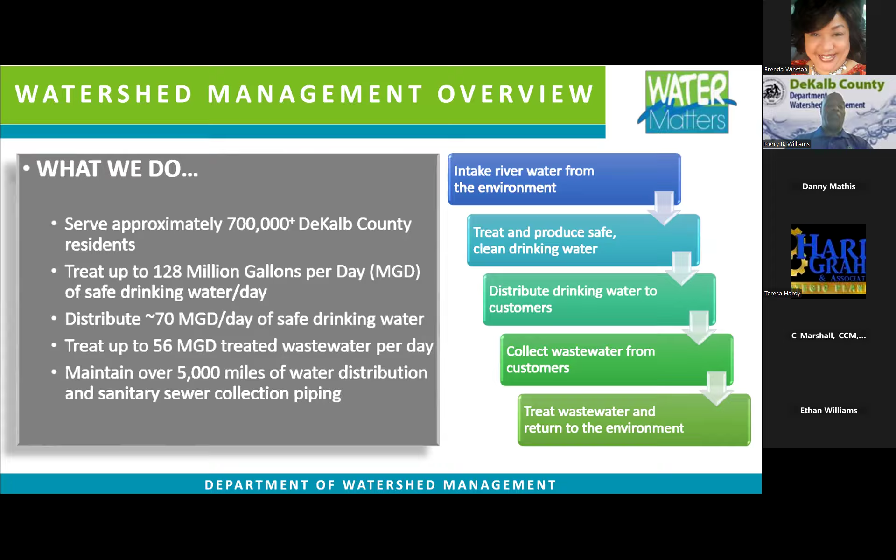To serve you, we clean, inspect, and maintain 5,000 miles of water distribution and sanitary pipe. Unlike a road, where you can see the asphalt deteriorating and needing repair, pipes in the ground you cannot see - out of sight, out of mind. That's why people tend to overlook this infrastructure that's been there since the 1950s. That's part of the project: to upgrade our infrastructure to bring you better water pressure, cleaner water, and reduce the likelihood of water main breaks in the system. Next slide, please.

So again, what do we do? Why are we replacing these lines? They improve our customer service, and as I just said, reduce water main breaks. If you experience discoloration in your water or low water pressure, it's probably because we have aged pipes in the system, and we are proactively trying to get those pipes replaced and updated to give you what your water bill pays for. I always like to tell people this is not your tax money, this is your water bill. Next slide, please.

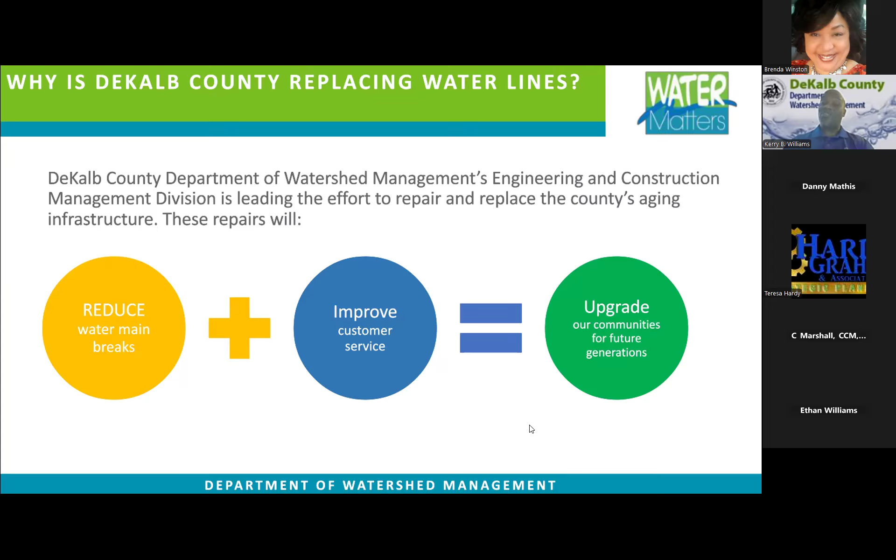Bringing you this project, we have a team of consultants such as AECOM and construction contractors such as GS Construction. We all work together for the design and construction of this. Next slide, please.

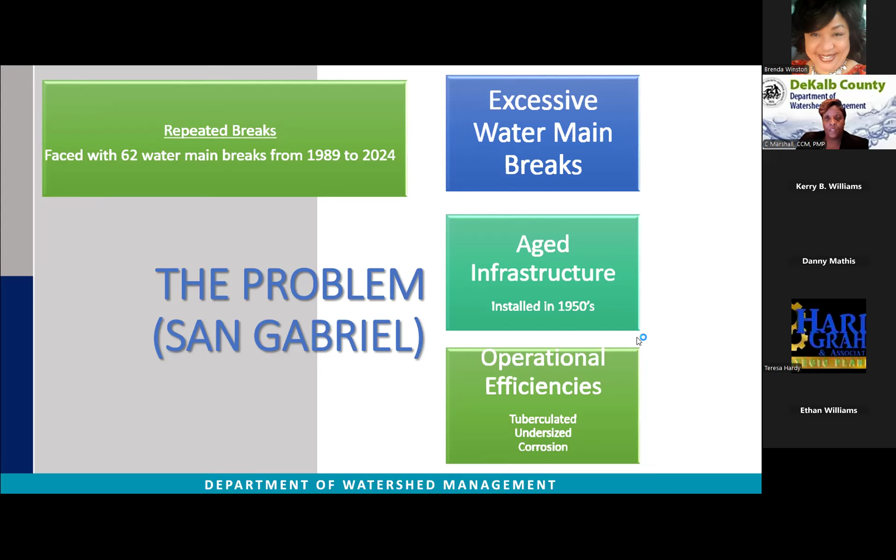So what is the problem and why are we replacing the pipes? This is primarily due to the pipes being installed in the 1950s, the infrastructure being aged, and other sections of pipe being undersized. In the area, the county has been faced with over 62 water main breaks from 1989 to 2024. As the number of pipe failures increases with time, it is a good indicator that the pipe is in need of replacement. The pipe material in this area is primarily old tuberculated cast iron pipes, 2-inch PVC, and cement pipe. The lifespan for these pipes is 50-plus years. Therefore, most of the infrastructure in this area is at the end of its useful life. Next slide.

So what is a capital improvement project? It's a project that helps maintain or improve an asset. It can either be new construction or a replacement of an existing infrastructure.

Last year, the Board of Commissioners approved a new CIP for $4.27 billion for projects to be completed from 2025 to 2034. The San Gabriel Water Main Replacement Project is a $20.5 million project within that plan.

My team, the CIP team, is responsible for getting the work done. My team includes 4 DWM construction project managers and 12 licensed inspectors.

Next up in the presentation, you will also hear from the DWM construction project manager, Mr. Danny Mathis. He has over 25 years of construction experience and has multiple certifications and licenses.

Along with in-house staff, we are also supported by consulting firms who help assist the county with construction management and inspection services. So what we want you to know today is we're here to help.

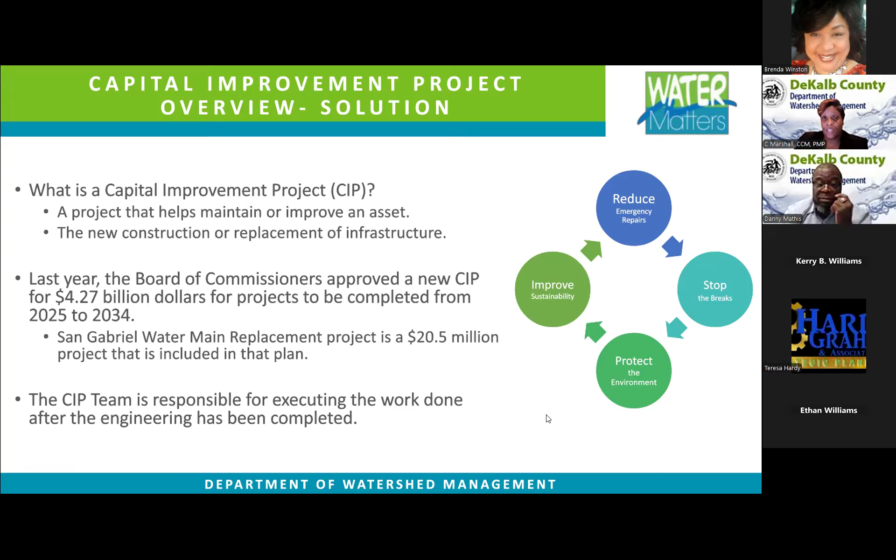We want to reduce or eliminate emergency repairs. We want to stop the breaks. We want to protect the environment. And finally, after this project is complete, it will improve sustainability to the system. These improvements should last a minimum of 100 plus years.

You will now hear from Mr. Danny Mathis, the construction project manager for this project. Thank you, Cassandra, for the introduction. Again, my name is Danny Mathis, and welcome to this presentation.

San Gabriel Water Main Replacement Project Scope. The plan is to install 36,500 linear feet of 8-inch DIP pipe, 5,400 linear feet of 12-inch DIP pipe, and 1,200 linear feet of 1.5 inch copper pipe, which is for the services, including service lines, hydrants, valves, pavement restoration, water meter boxes to grade.

The trench will be milled and resurfaced once the new water line is installed and completed. The existing 6-inch water main will be abandoned in place and filled with non-shrink grout.

The site conditions will not be altered from the existing. All disturbance pavement and landscapes will be replaced in kind. Erosion control BMPs will be installed throughout the entire water main alignment. No more than 1,000 linear feet of trench will be opened at one time and must be filled and covered daily.

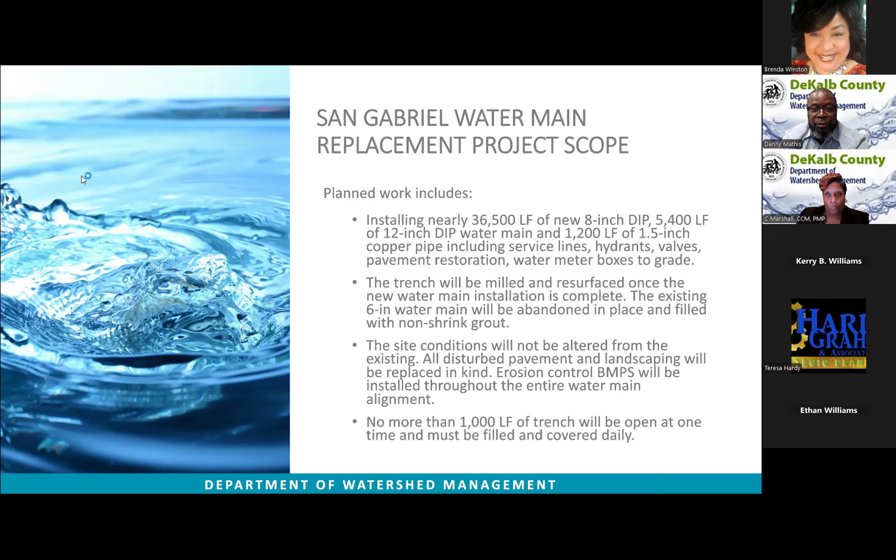There are 23 affected streets for 3 phases of this project. We're going to pause for a second, let you find your street, and then we'll go to the next slide.

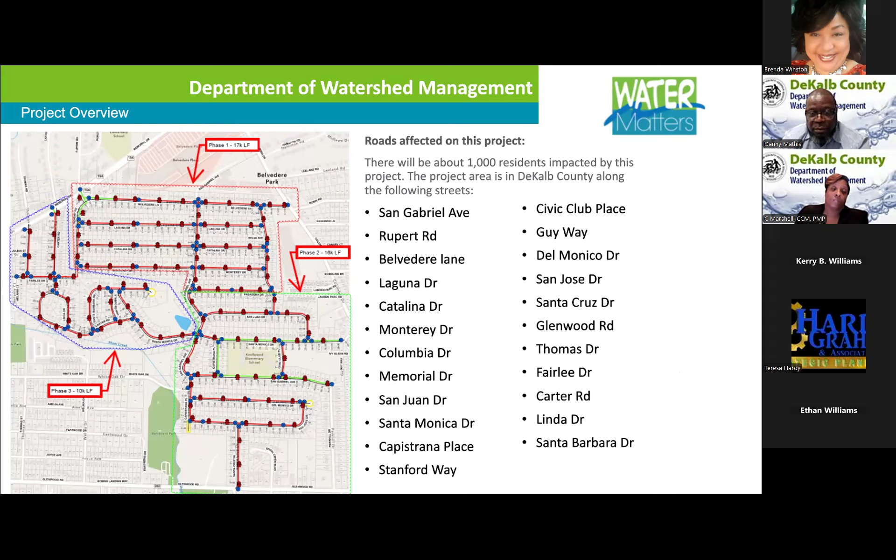The open cut method consists of cutting the asphalt, digging the trench, and installing a new water line, backfilling the trench and replacing the asphalt.

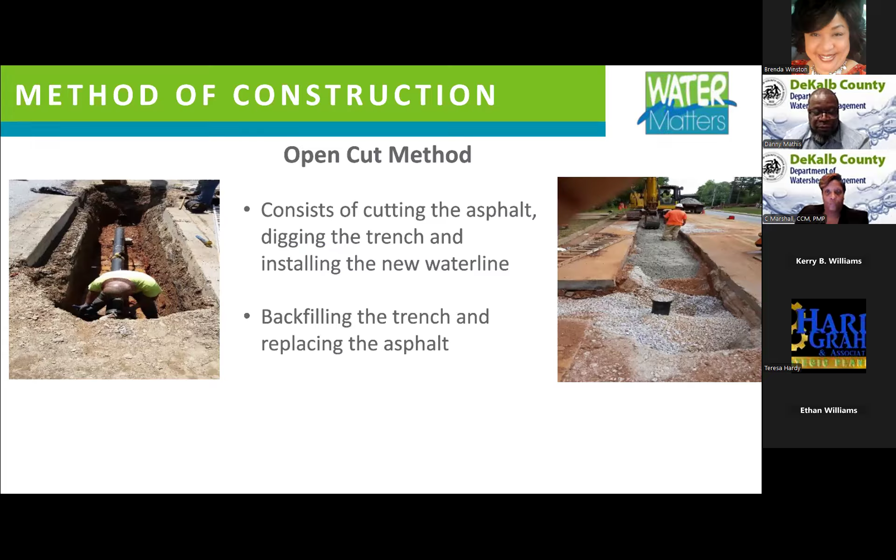Schedule of activity: community notices went out the week of September 29th. The community meeting is today. Mobilization starts October the 9th. Construction starts the week of October 13th. Final restoration and paving starts August 2026. End of construction December 2026.

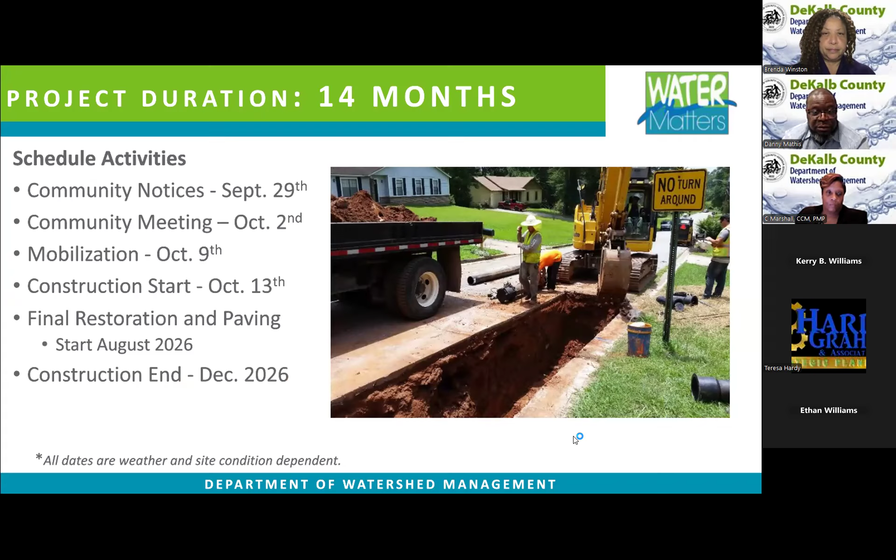Boots on the ground, that's my team. My team will be responsible for ensuring erosion control and sedimentation controls are in place, ensure proper installation of the pipe, will handle customer complaints, coordinate with other municipalities, and ensure traffic control is maintained and safety measures are followed.

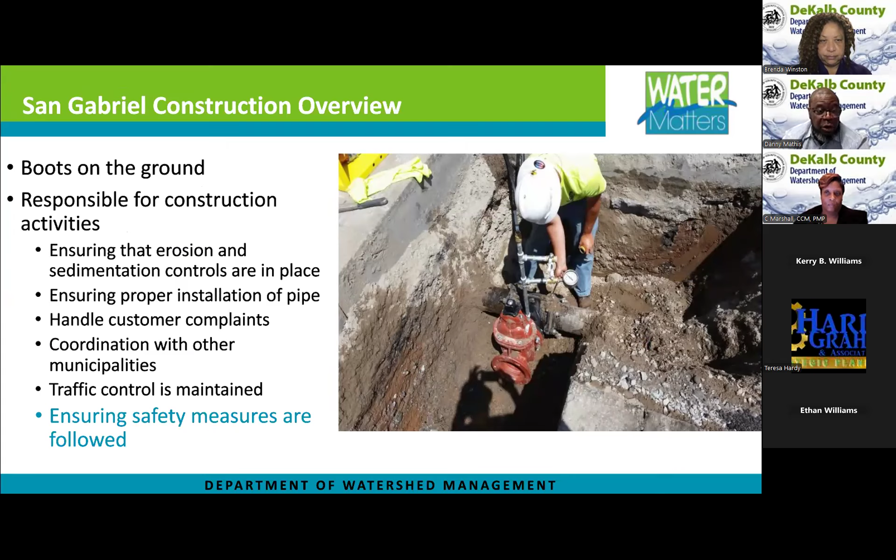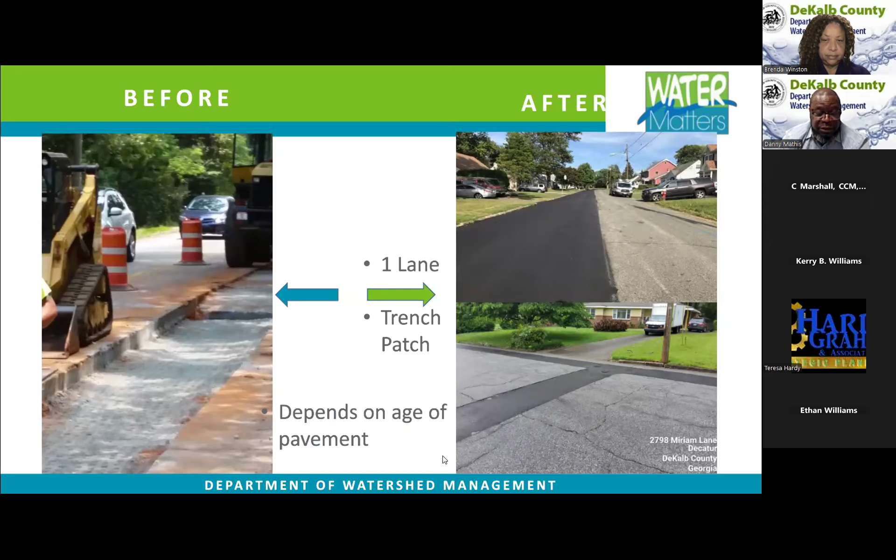This picture represents before and after. Before, we have the trench open and we're backfilling with graded aggregate base, putting it in 2-foot lifts, and tamping the street. The picture on the right is just a trench patch, and the trench patch will be installed on this project, depending on the age of the existing pavement.

Next you will hear from Ms. Marshall again. Thank you, Danny. I will now address community concerns and what the community should be aware of.

Okay, so everybody hates construction, right? But we want the pipes to be replaced. So unfortunately, what comes with construction is inconveniences, which we want to try to minimize. What you're going to see is a lot of construction traffic, foot and vehicles, large dump trucks, and heavy equipment.

There will be construction workers, county employees, and contracted workers throughout your community. There will be material and equipment deliveries by means of large tractor trailers. However, we will have flaggers on site that would help guide these vehicles in and out of your community.

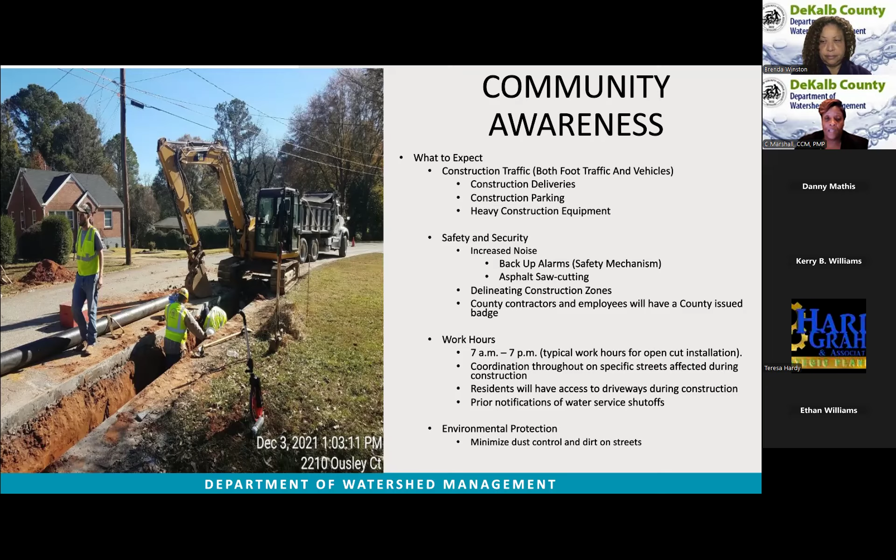What also comes with working in the area is the parking issue. There will be vehicles parked alongside the streets and along the work zone. Work zones will be delineated by means of orange cones or barrels. In addition, as a security measure, all county contractors and county employees will have identification badges and marked vehicles.

There will be increased noise from the equipment backup alarms, heavy equipment, and saw cutting of the asphalt. Our typical work hours are from 7 a.m. to 7 p.m., Monday through Friday, and sometimes weekends, and in cases of emergencies, sometimes on Sundays. Rest assured that all residents will have access to their driveway during construction.

However, the work is occurring in a linear fashion, so your driveway may be blocked to allow for installation of the pipe. When this occurs, the contractor will ask if you need to get in and out of your driveway before blocking it, and may request that you park on the street for the day. In other instances, if the driveway is blocked, just come out and ask the construction team to let you out, and the contractor will move the equipment so you can leave for the day and return later.

Also, this work generates dust. We want to minimize dust and dirt on the street. Therefore, the contractor is responsible for keeping the streets clean and swept daily.

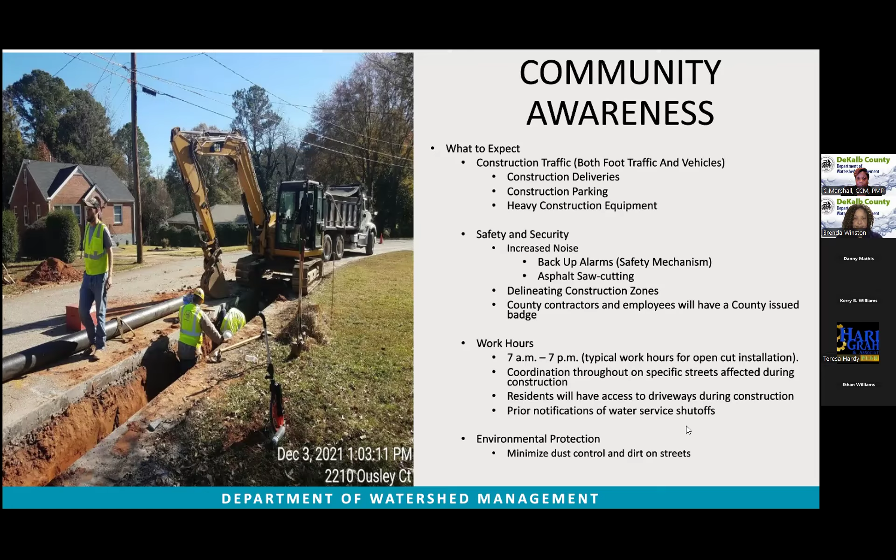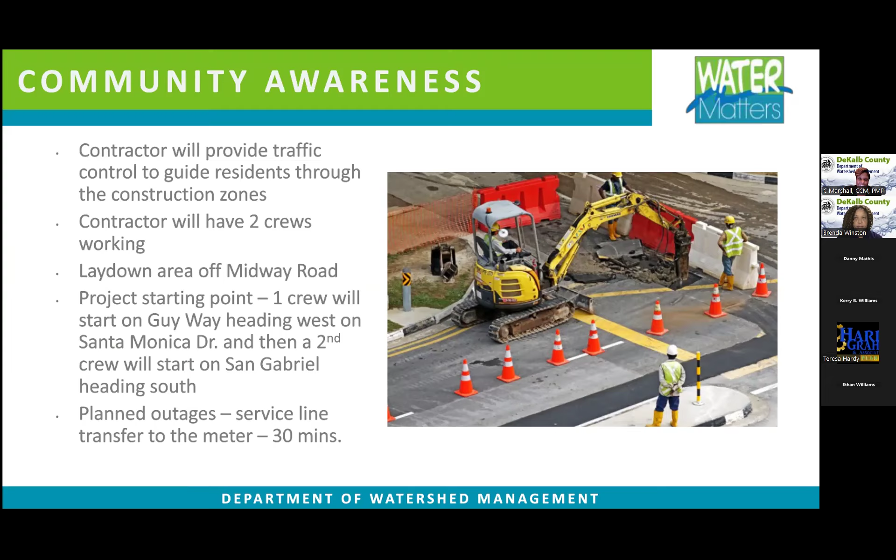The contractor will provide traffic control to guide residents through the construction zone. The contractor will have two crews working. The current laydown area for materials and equipment will be off of Midway Road. The project will start with one crew on Guy Way, heading west on Santa Monica Drive, and a second crew starting on San Gabriel, heading south. There will be planned outages, generally when we're doing the service line that runs to the meter of your home. When we're transferring the new service line over, that generally is a service interruption that can last up to 30 minutes.

Next, you will hear from Miss Brenda Winston about the public communications update.

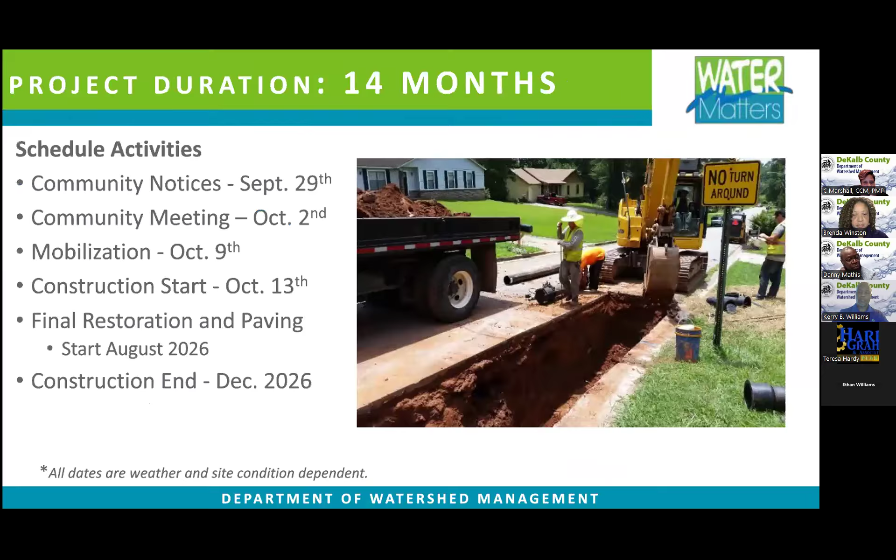But if you put your email address in there, we plan on doing monthly updates so you can know exactly when all of the work is occurring. So it kind of looks like you'll be starting in phase two in my neighborhood first, that's the impression I'm getting.

And as it goes south down Santa Monica, then it'll start also branching east and west as well, going all the way down to Santa Cruz, which is south. I'm sorry, yeah, that's south. So you would be going east and west on Santa Monica, and north and south in the other directions. Okay, sorry, I had to use my compass.